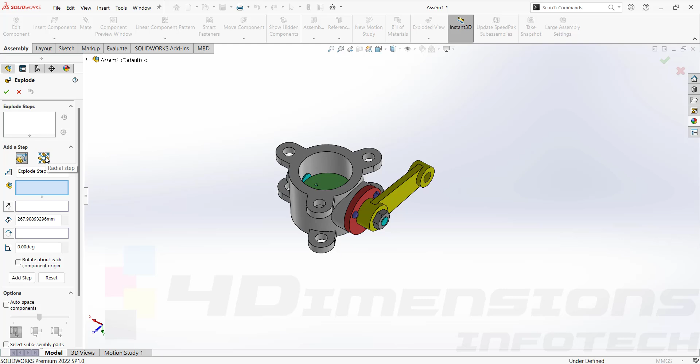The first part I'm going to explode here is the last part which I have mounted in the assembly. So I'll start with this nut. Select the nut and drag to the axis direction in which it was mounted. After exploding and dragging each part, we have to say done here. You can see at left side, and then only go for the other part.

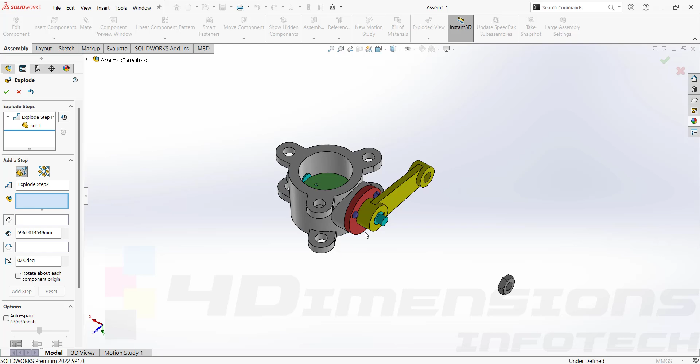Select the next part. Again drag the part in the required axis direction. Say done. Then the other part, which I am going to take these screws out here. So select all the screws together only. And then drag the part according to the axis.

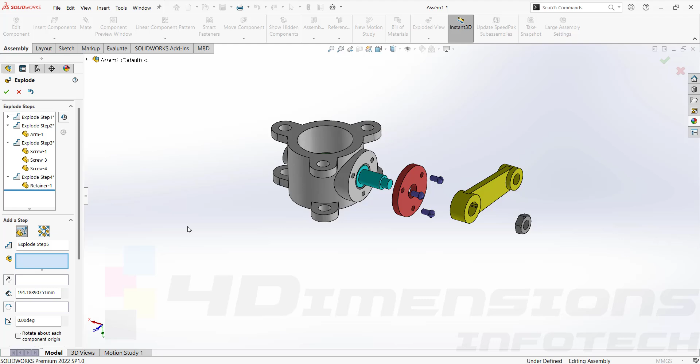Again say done. Next part here is the retainer plate. I'll select the plate and drag the option there. Say done. Now this elliptical plate is mounted on the shaft and it is a little bit inclined.

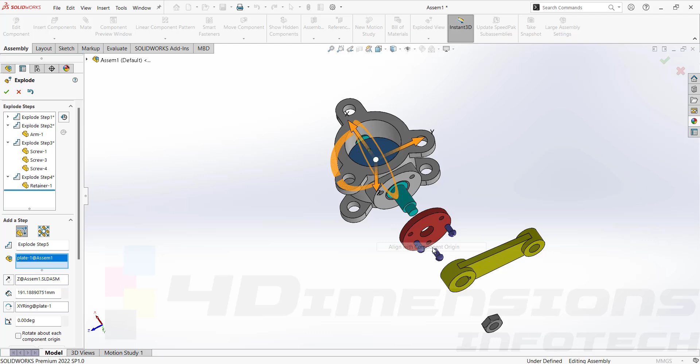I'll select this part and you can see the center point here, it is showing in white color. I'll right click on the center and say exploding align with the component origin. We have to select this option, align with the component origin, and then drag this part here so as to explode the part according to the direction mounted on the assembly.

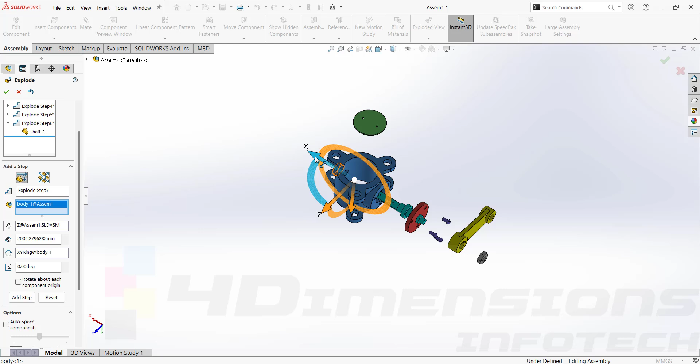Say it done here. Then the next part, I'll take this shaft, drag it according to direction. Say done. And then go for the last part. As there was no space for dragging the shaft, I'll drag this part only here. Say done. Again select the shaft and take it a little bit forward so as to place it in proper space. Say done. And now this assembly has been exploded here.

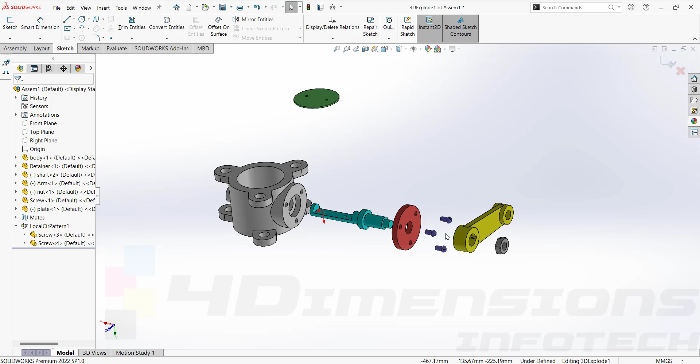I'll say it okay. Next thing we are going to provide here is routing lines, which will resemble the assembly, how each part has been assembled with the alignment of the other.

For that we have to select the faces which are going to be aligned there. You can see the opposite directions are being shown by the arrows here. We'll click on the arrow and put it in the same direction. Then this handle is going to be assembled with this retainer plate at the center.

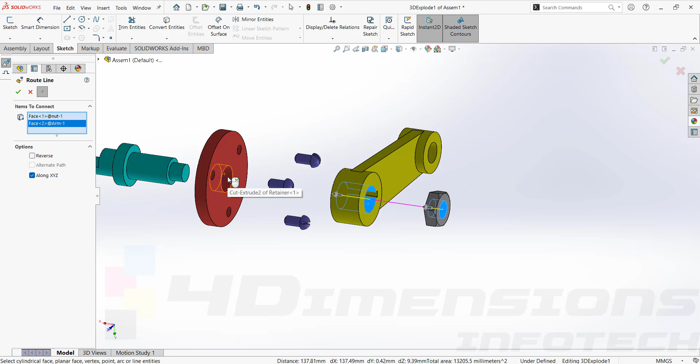So I'll select this center face. Then this plate is going to be assembled with the shaft, so I'll select this shaft face here, circular face. And then the shaft is going to assemble in this part, circular part face. So now the line diagram for routing is completed here for one set.

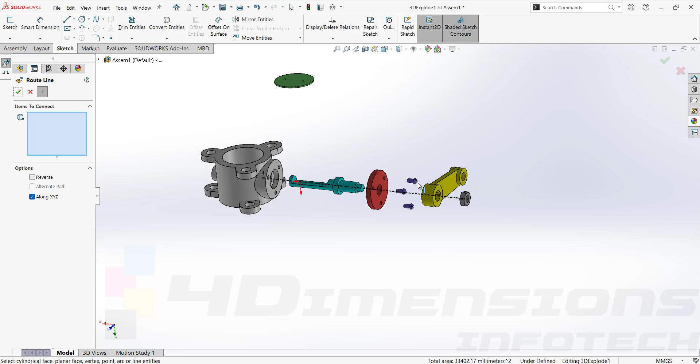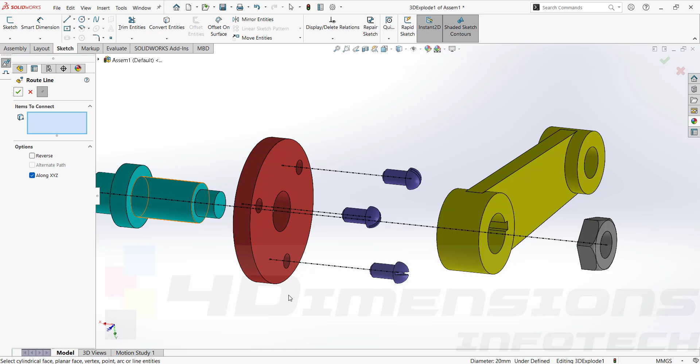I said okay. Next, these nuts, put the arrows in same direction. The other nut, change the directions properly. Then the last nut. Again the items to connect.

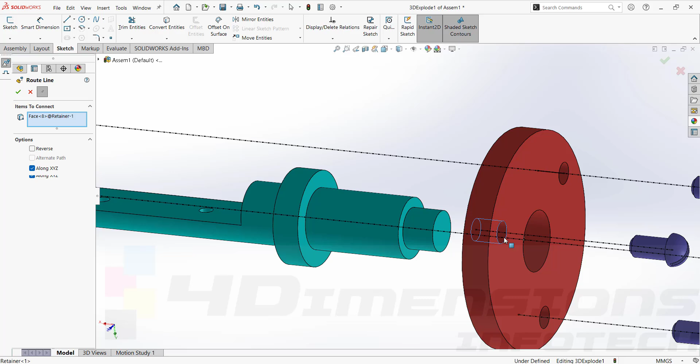This retainer plate is going to be aligned with these holes here. So I'll connect that holes also with the routing line. Select the required face. Put the arrows in same direction. Say OK. Then the second hole, direction of arrow. You just need to say OK for the one time only.

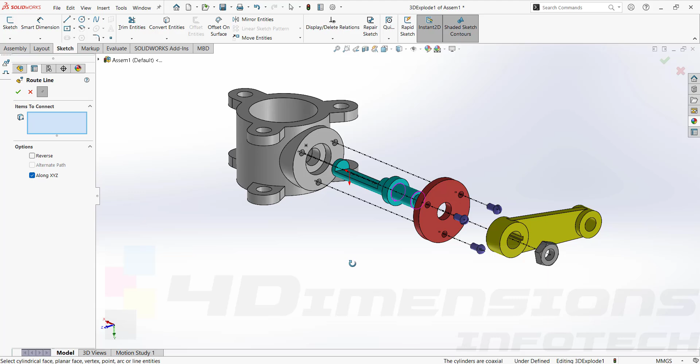Then this space will be empty again, and you can again give the selections there. So now these routing lines are also been provided there. Say it OK. And now you can see all the parts' routing lines are being shown. We'll finish this by saying it OK again.

And now this part has been exploded. We'll say it exit sketch. Okay, this one part was remaining showing the routing lines, so I'll give the routing lines for this part also.

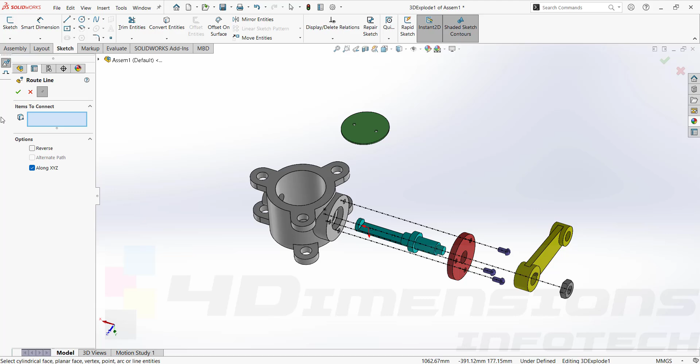Select the bottom arrow of exploded view option again. Go for explode line sketch. Then again put the routing lines here. So this plate is going to be mounted on the shaft. That's why I've selected this circular faces. Again the other two faces.

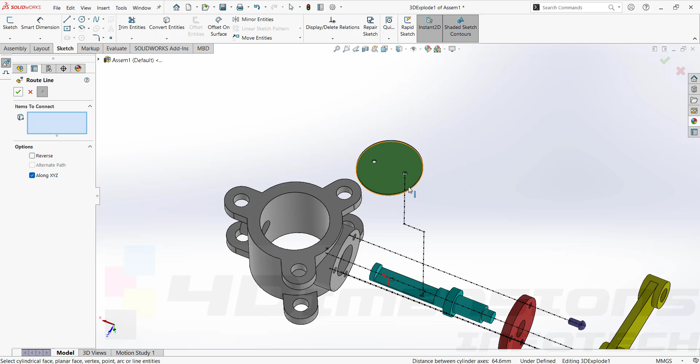You don't need to select all the selections together. At a time show only two faces there. Say OK and again go for the other two faces. That will be the proper way.

Just check the arrow direction in between. Now it is showing proper way. Say it OK. And now all the routing lines are being provided there in assembly showing the alignments. Say it exit sketch.

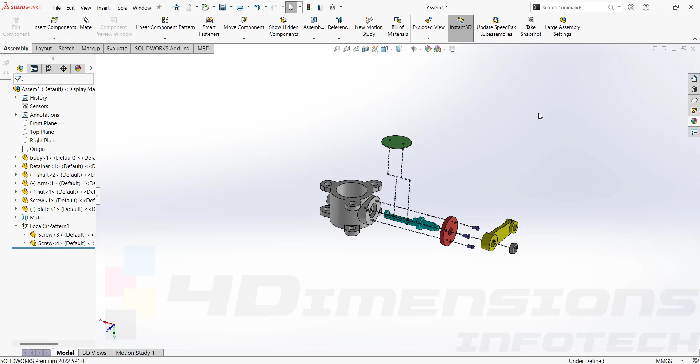And now when you click on the title of the assembly, we'll go on this title, say right click. Again we will click on collapse here. So this assembly will be reassembled or unexploded again.

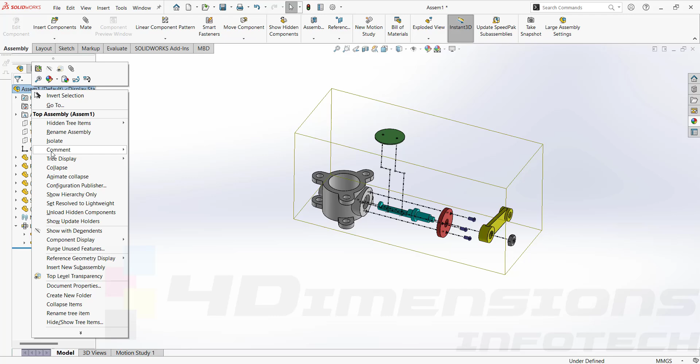If you want to see the exploded stretch, go for assembly option, say right click and say explode. It will repeat or show the exploded view which we have made earlier. Again say collapse. Again right click and say explode. So in this way this exploded view has been saved in the assembly. So anytime you can go and collapse and explode the assembly view.

If you want to see the animation of the explode cycle, you can right click on the title again. Go for animate explode. Now it will show one by one how this part or assembly has been exploded there. If you want to see it in a loop mode, here there is an option animation controller. You just need to select playback mode and then again say play.

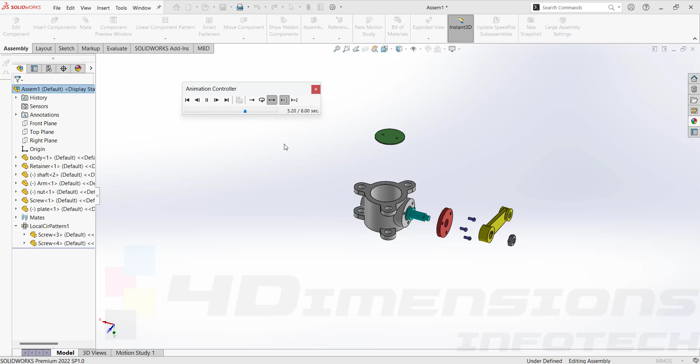If you want to slow down the speed of the animation, say slow play. And you can see how these parts were assembled here. So in this way you can save animation as well as save the exploded steps there.

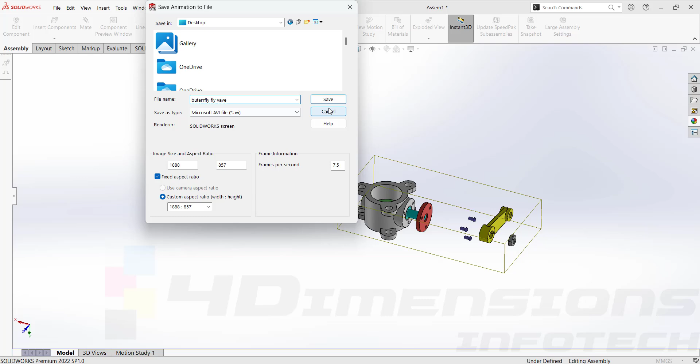If you want to record this animation for a purpose to send or share, then you can say save animation here. We will show the path in which we have to save the file. I'll say desktop. If you want to change the assembly or animation name, I'll say butterfly valve. Then say save again. Say OK.

Now this screen will buffer a little bit, saving the animation. At least you have to wait for one cycle to be completed there. I'll say stop again. And now we'll minimize the screen there. And here the butterfly valve animation has been saved. I'll right click and say open with media player.

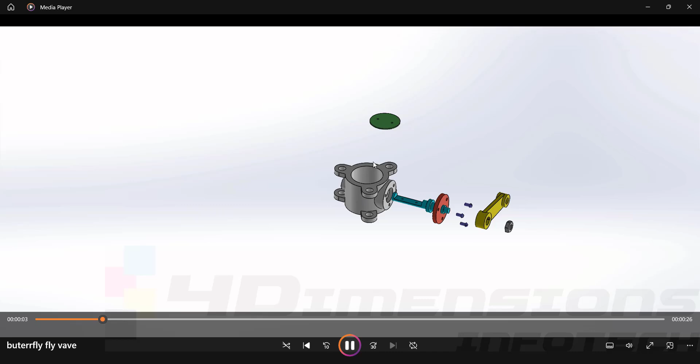And now you can see the animation being played here. The display will not show any reference of Solidworks here, neither model tree nor the ribbon. Only this animation will be saved here. So in this way you can save the animation and share the video you require.

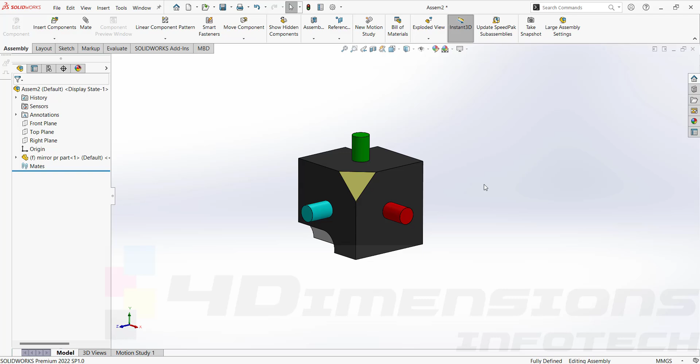So this was exploded view here. Right click, explode. Again right click on title and say collapse. So the next assembly feature we are going to see here is mirror command. That option of mirror you will get in this linear component pattern. Here it is given linear component pattern, circular pattern as well as mirror components.

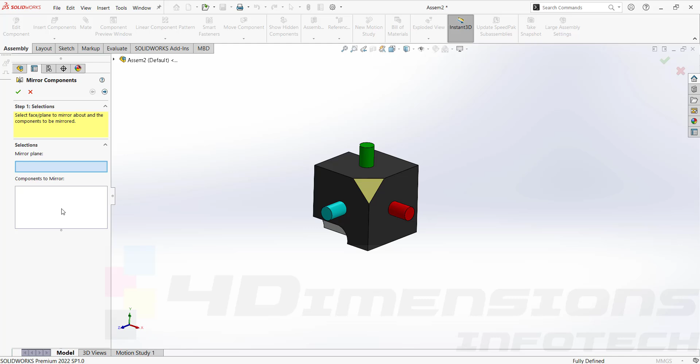We have not seen linear component pattern and circular component pattern. If you want to pattern the components, you just use the same method as we have used in part modeling. So we'll start with mirror components here. In components to mirror, I have to select this part. I have made this part specially for mirror command only. You can see here, these pillars' colors are matching with the UCS colors XYZ.

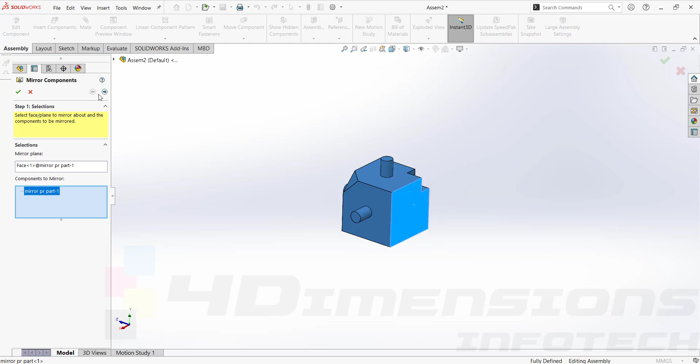First we have to select the components to mirror and then select the reference plane. So I'll select this face as a reference plane. Then we have to click on this option, that is next. As soon as you go for the next, these options will appear there, showing how these parts are going to be mirrored, according to the boundaries of the box or according to the center of the mass.

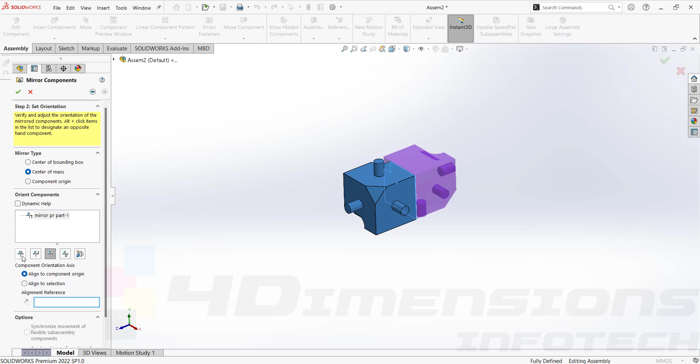So this mirror command is a little bit different compared to the features mirror command, in the sense that it has orientation options. So you can see the first orientation. I'll select the center of bounding box so as to understand the command. It is showing all the axes at the similar sides. Say OK. You can see X, Y, Z are at similar sides and this mirror part has been created here. Again say edit feature, select the second orientation and OK.

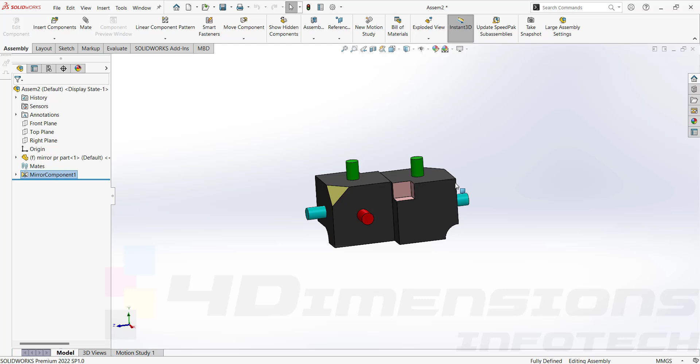Now the cut's position is changed here and these green pillars are showing at the similar sides. It means that this object is mirrored but oriented along the Y axis. Again say edit feature, we'll see the next orientation. This time it is X axis, as both the shafts of red color are at the same sides. So again this part is mirrored but along the X rotation.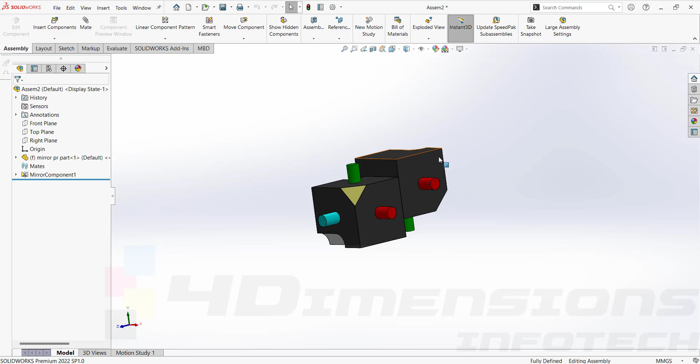You can see this cut is coming at the other side, at the upper side, as it was rotated along the X axis. Again, next option, the last orientation, that will be around the Z axis. You can see here both the axes are showing at the similar direction, and this cut is rotated around the Z direction, and that's why this slot is coming at the upper side.

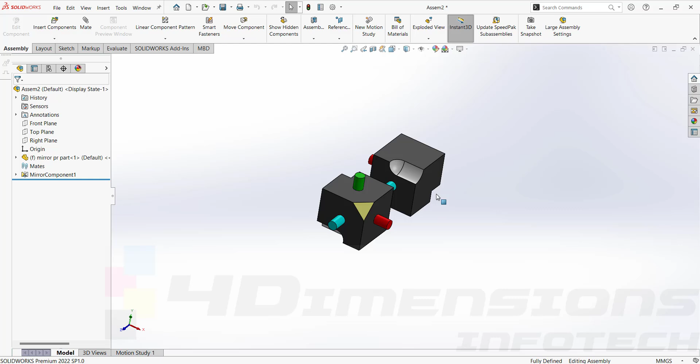So in this mirror command, you can orient the object along the axis you require, which is not possible in the regular mirror command as we used in part modeling. That's why it is a little bit different. But the patterns, linear component pattern and circular component pattern, are similar to part modeling. That's why I am not repeating those commands here. So this was mirror command with different orientations.

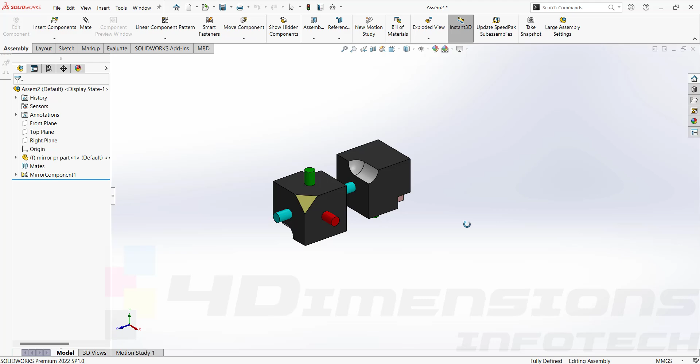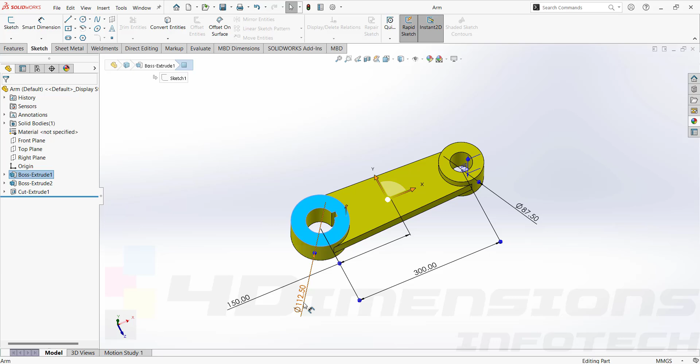Next thing we are going to see here is configuration of parts. So to configure the part means, suppose if you have made configuration for this part, I can make it in different sizes and update the part according to the configuration. So to start with the configurations, I'll open this part, and now after double clicking you can see the dimensions of the part here. The center to center distance here is 300 mm, and this outer diameter is showing as 112.5. So we will update some of the values here and configure this part in two different sizes.

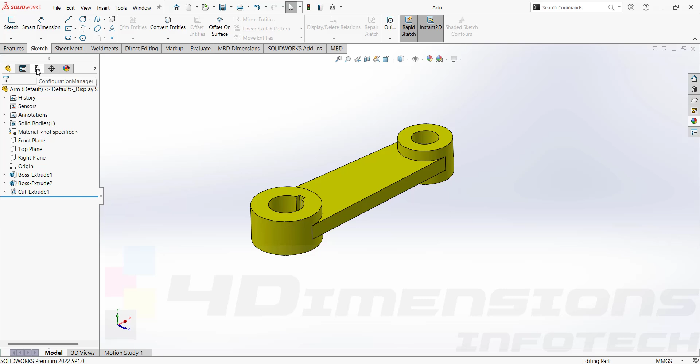So for configuration, you can see in left side the model tree is given, and above the model tree, the third option is given as configuration manager. We have to select this option here. The part name is being displayed here, that is ARM, and the current configuration is default configuration. So to create another configuration, I'll right click on this option, say add configuration. We have to provide one name here. I'll say config 2, configuration 2. Now there are two configurations. First one is default and another one is configuration 2.

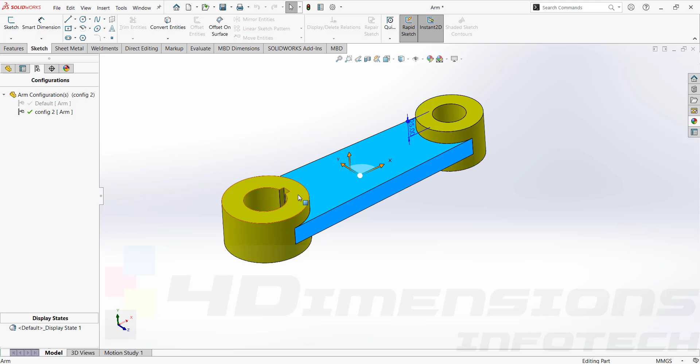So in the second configuration, I'll double click on these parts so as to edit the values and change the sizes. Suppose I want this distance to be shortened here. Double click on the distance and this box will appear. If this box is not appearing, cancel the dimensioning option, double click the part again, and again click on the dimension. If it is showing a single box, this is not of use. Select the part again, double click, and we need this box only. You can see one drop down menu here. Select that option, go for this configuration. Instead of all configurations, I'll select this option.

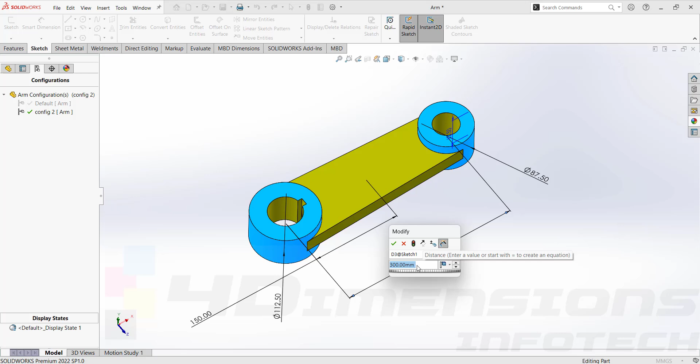And here I'll change the value. I'll say it as 180. Say update. And now this handle size has been updated. Now if I double click on this default configuration, it will show a different sized arm. Again go for the next configuration by double clicking. This is showing the same part with different configuration. So in this way you can update the configurations. I'll go to home by clicking on this option and I'll save this part. Say Ctrl S, and now this part is having two configurations in configuration manager, default configuration and configuration 2.

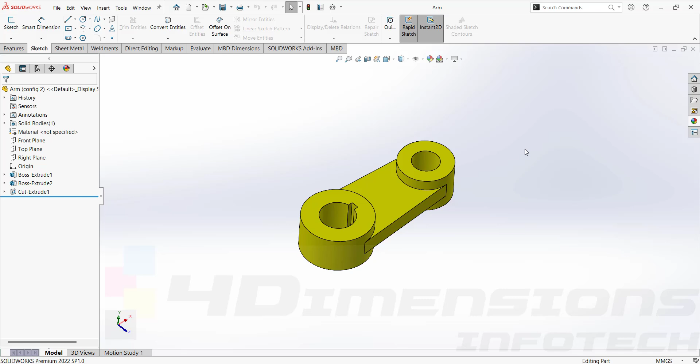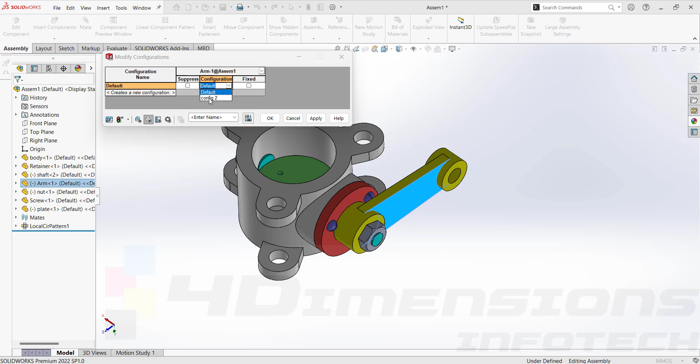Now we will see how to update this part in assembly also. So I'll save this part and shift to assembly. Now in assembly, I'll right click on the part and say configure component. In configure component, you can see the configuration option. Select this drop down menu and instead of default, I'll say configuration 2. Apply and OK. Now the handle is showing in a little bit smaller size. That was our configuration number 2 for the handle. Again, if you want to update this configuration, right click on the part, go for configure component and say default, OK and apply. So in this way we have configured this part.

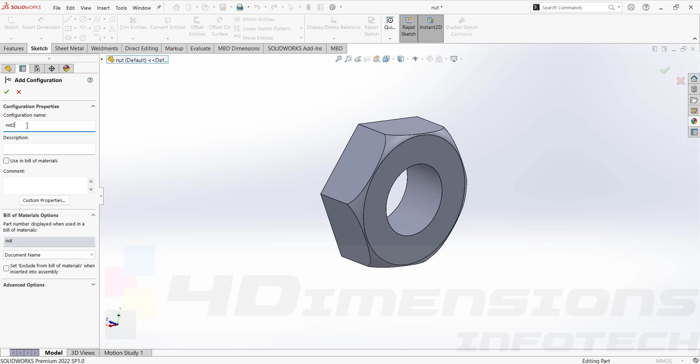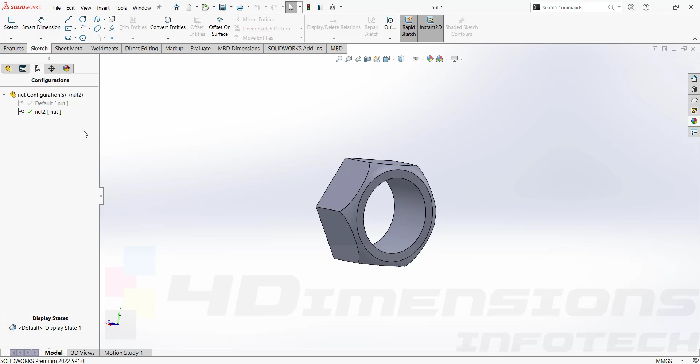We'll repeat this configure option for this nut also. So I'll open this part and here we will change the size of the nut. Configuration manager, right click on the title, say add configuration and give one name here. I'll say nut 2, OK, and now double click on this part. If you want to change the size, double click on the value and select this configuration option only. It is compulsory to update this option here, then change the value. I'll say 50 this time. Update this part. Now there is default configuration and the second configuration. I'll go to home and save this part.

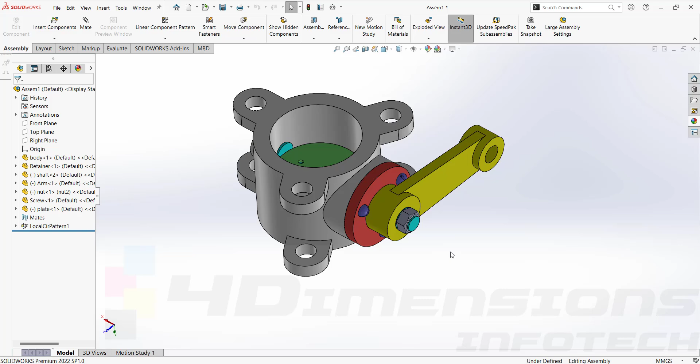Again go to assembly, and for configuring this nut, click on the nut, right click and say configure component. Here we have nut 2, apply and OK. So now this nut size has been updated. Again, if you want the same size of nut as it was earlier, right click on the nut, go for configure component again and select default. Apply and OK. So in this way you can configure the part and display it in assembly also.

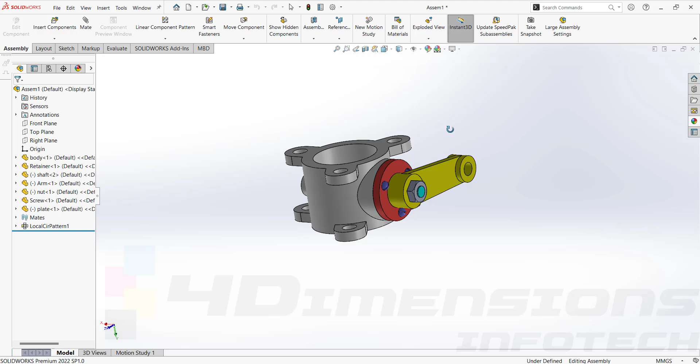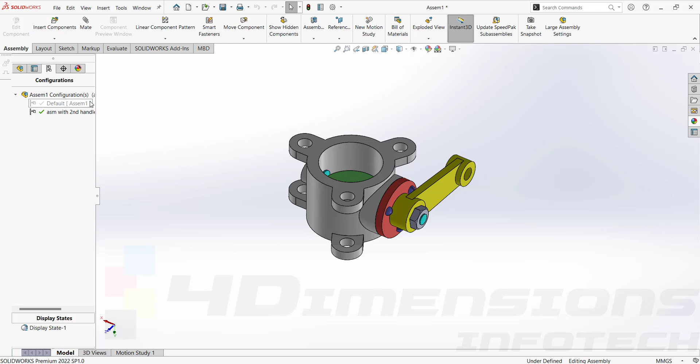We can also make configuration of assemblies here. For the configuration of assemblies, we'll go for configuration manager in assembly itself. Right click on title, say add configuration. I'll say assembly with second handle. I have given the title, say OK. And now there is default assembly and assembly with second handle. In this configuration, I'll update this handle size. We already have the configuration of this handle. I'll right click on this part, say configure component, and now you can see assembly configurations here. In assembly with second handle, instead of default, I'll select config 2, apply and OK.

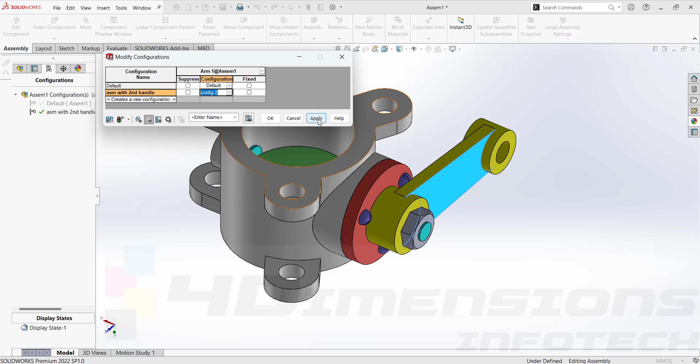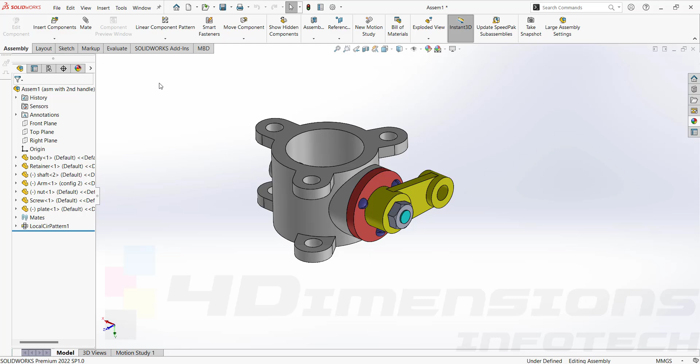Now you can see assembly with second handle and default assembly. There is a difference of handle size. As I click on default assembly, the handle size is changed. Again go for the second configuration. This handle size is again changed. So now we are having assembly configurations also with different handle sizes. So this was part and assembly configuration. It is a very useful tool if you are having similar parts but of different sizes. You can just configure the part and accordingly configure the assemblies.